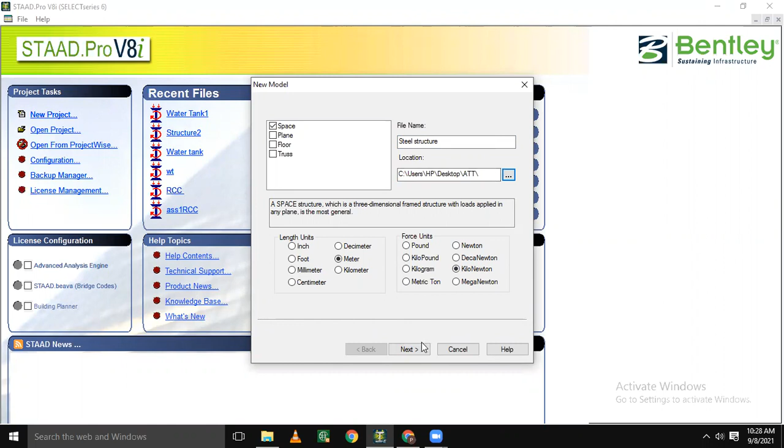Okay, I'll take a new project. Click on space. I'll give a structure name, steel structure. Unit should be in meter and kilonewton. Click on add beam. Click on finish.

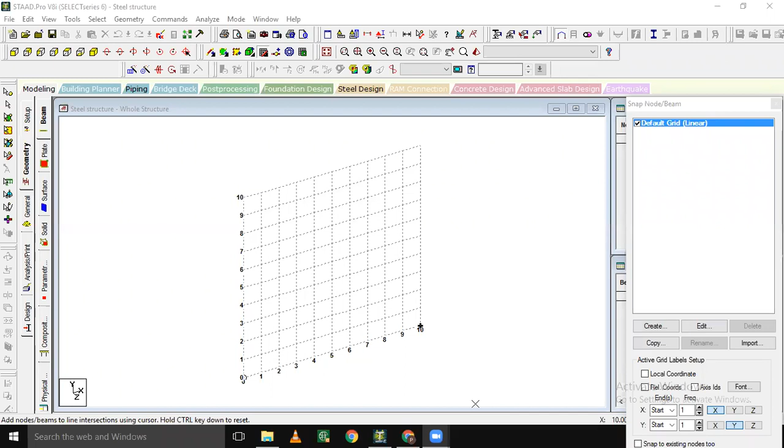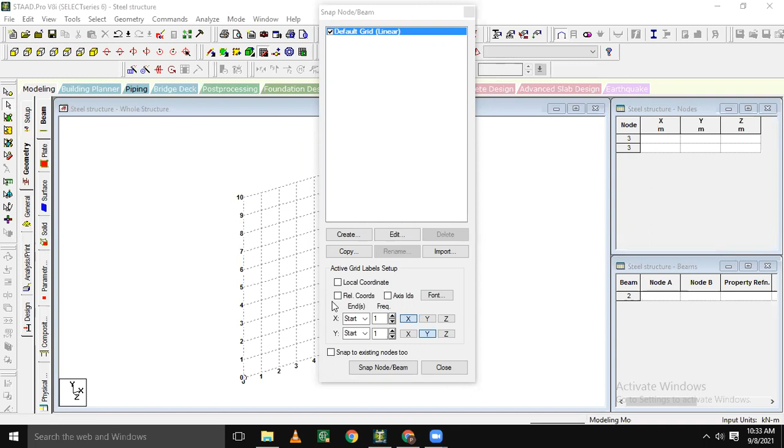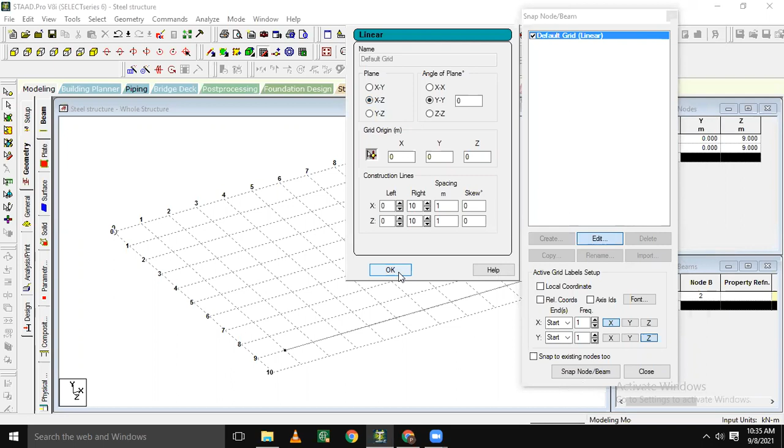Okay, what we have done, we go in SnapNode. Now in SnapNode, go to edit command. In edit, select XZ plane, okay, and click on OK. Then go to Snap Node/Beam box and click on it, using this SnapNode beam command, make a beam.

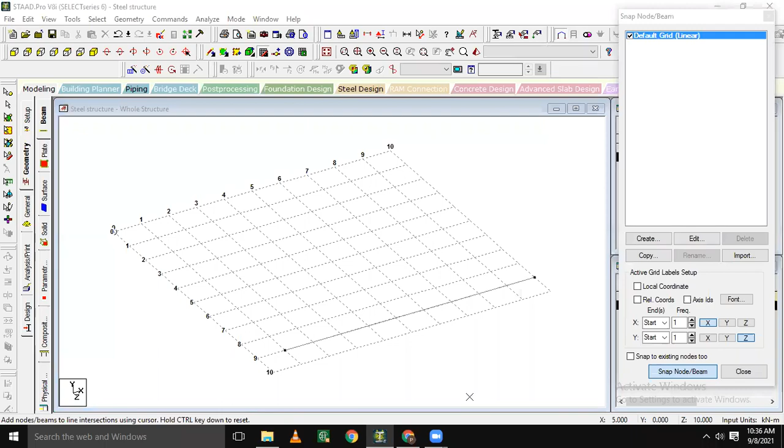Okay, now we created a grid of length 9 meter and width 9 meter. Now the next step is we need to give the height to this grid to make it a frame.

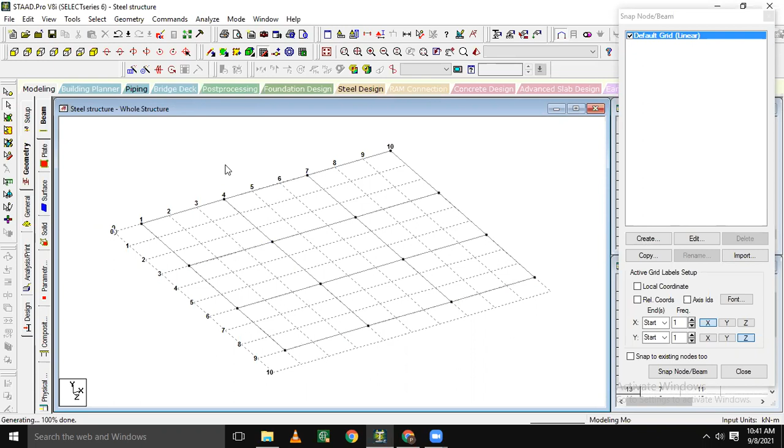Now just Control A, select all these beams, and again use command translational repeat. Now the direction will be y direction, so we need to select global y direction.

Number of steps, we need 2 floors plus foundation, so number of steps are 3. Default spacing will be 3, but my foundation is of 1.5 meter. First floor is 3 meter and second floor is 3 meter.

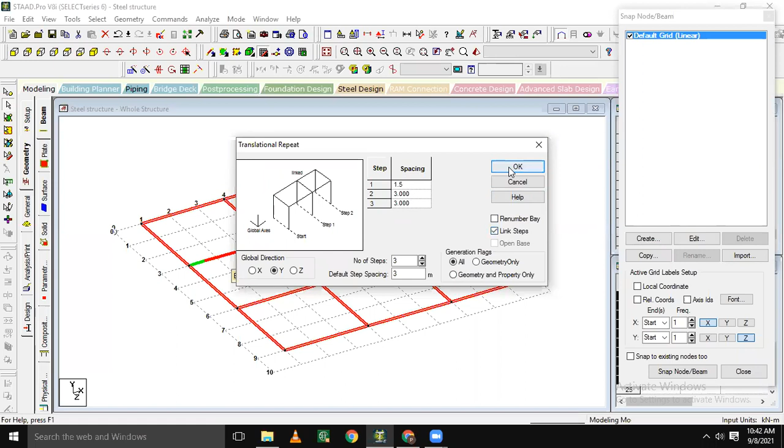Superstructure is of 6 meter and substructure consists of 1.5 meter. Now click on link step, click on OK.

Now just delete all the bottom beams, and turn off this grid. हे खालचं grid आहे ते off कसं करायचं?

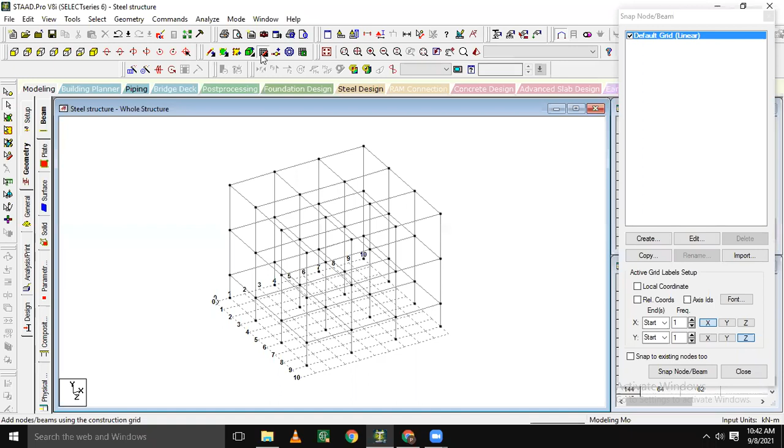For that you need to go to Snap Node/Beam and just unselect it. Just unselect the SnapNode beam and it will get off.

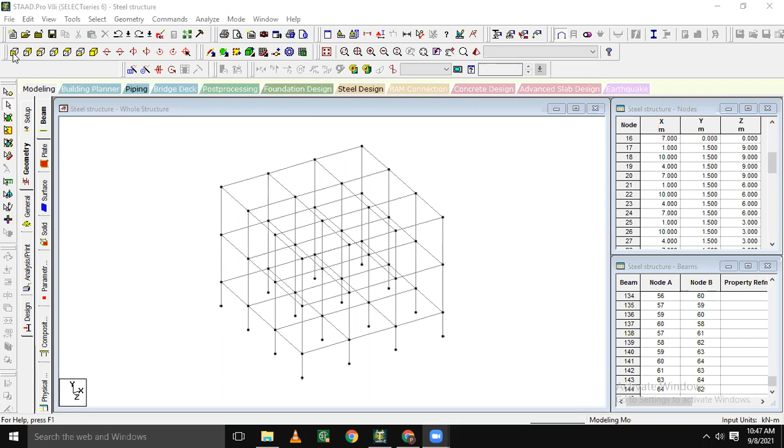To assign support, keep your structure in front view. Next step is assigning support. To assign support, keep your structure in front view.

Go to command. In command, we need to select support specifications. In support specification, we need to select fixed support.

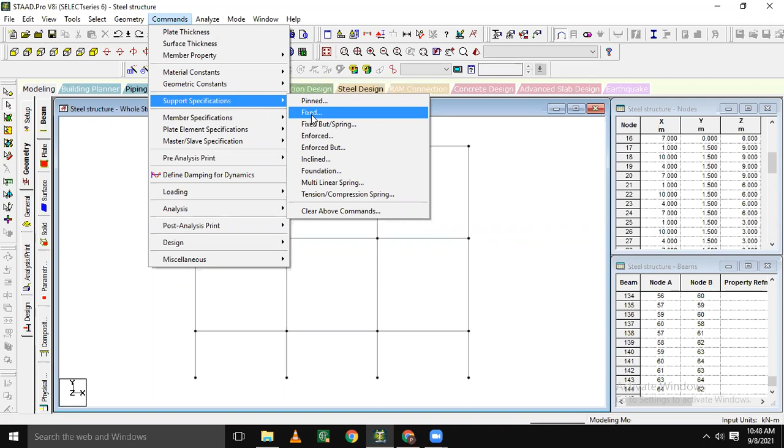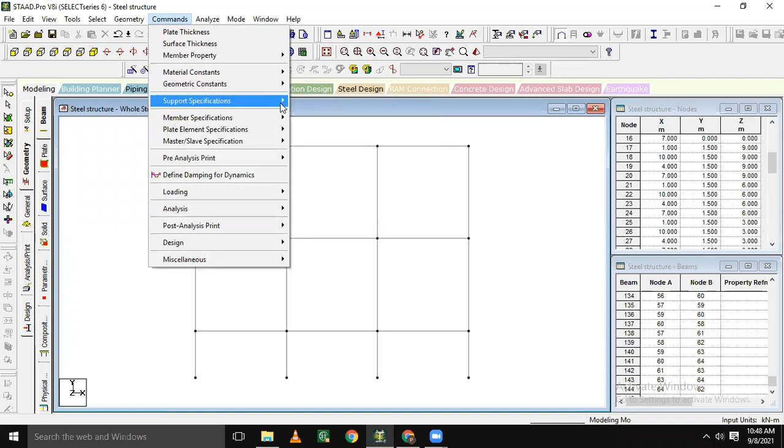Okay, got this? Just click on fixed support. In command, go to support specification and select fixed support.

Now you can see this support page will open. इथे खूप सारे फोर्सेस आहेत - फाउंडेशन, इनक्लाइंड, फिक्स्ड, पिन, फिक्स्ड बट वगैरह फोर्सेस आहेत, एनफोर्स बट, स्प्रिंग सपोर्ट. आता आपल्याला फिक्स सपोर्ट हवाय. फिक्स सपोर्ट मध्ये काय असतं? Forces as well as moments are restrained in fixed support.

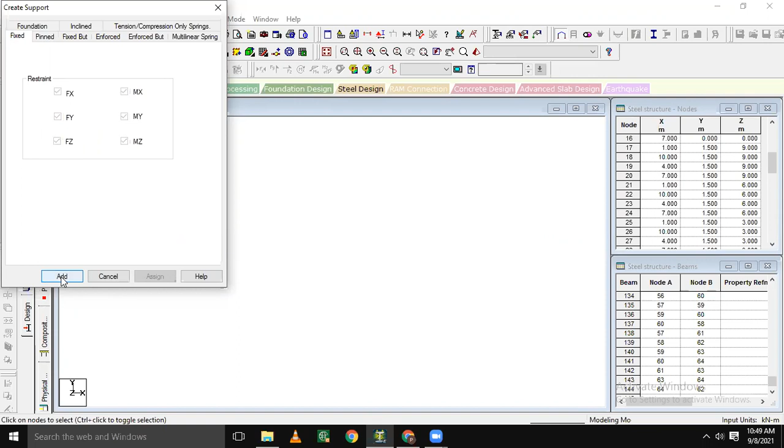In pinned support, only forces are restrained. We need to select fixed support, just make sure all these boxes are checked, and click on add. Now go to support again.

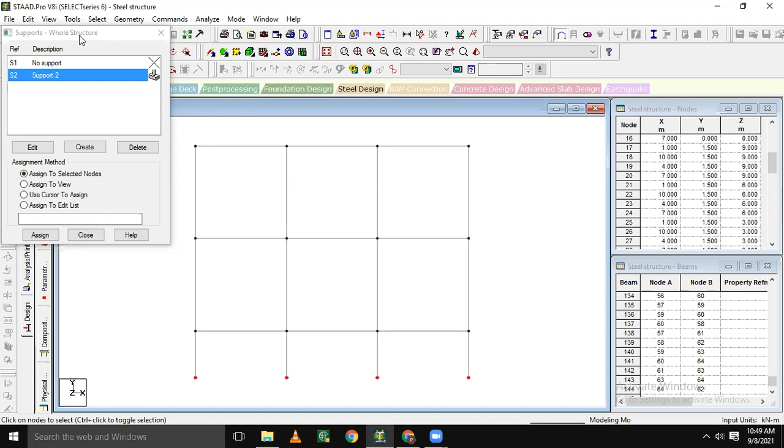Go to selected support again, and by using node cursor, just select the bottom nodes of the structure. Here red highlighted, that means all the bottom nodes are selected. Just click on assign to selected nodes and assign it.

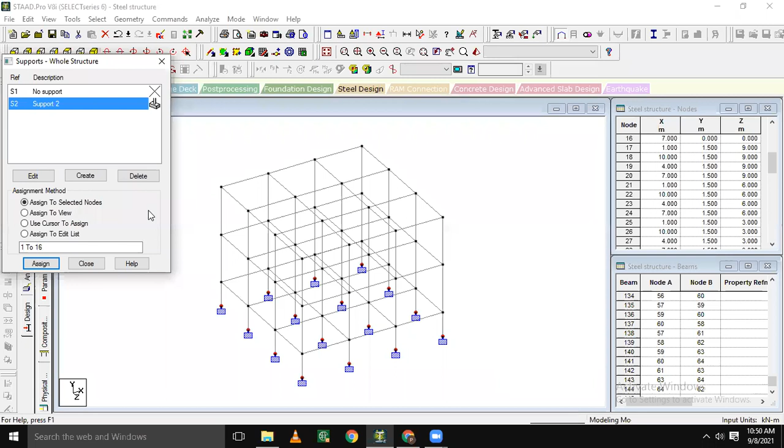की अजून एकदा रिपीट करायचं?

Next step is we need to take a check for duplicate member and duplicate nodes. For that, go to tools, then check duplicate, and click on nodes. Tolerance will be 0, click on OK. It says no duplicate nodes are found, meaning duplicate nodes are not present in the structure.

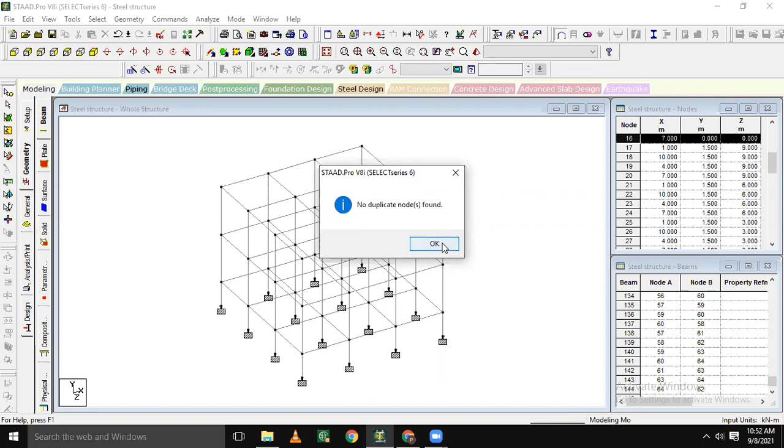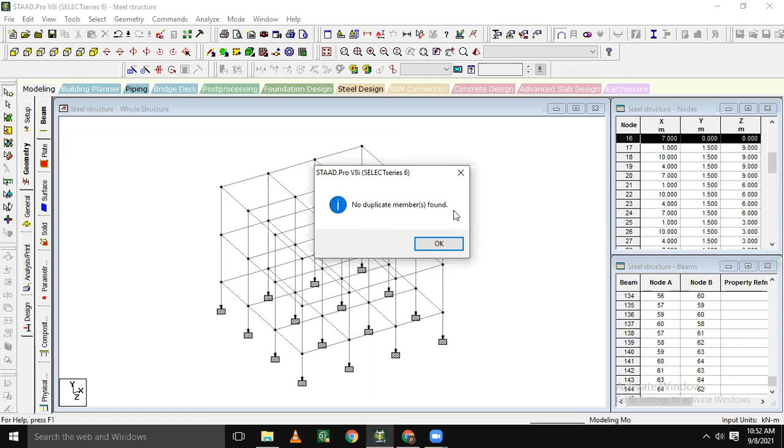Click on OK. Now check for duplicate member. Go to tools, check duplicate member. It shows no duplicate members are found, meaning our structure is okay. Click on OK.

Okay, now the next step will be property assign, assigning the properties.

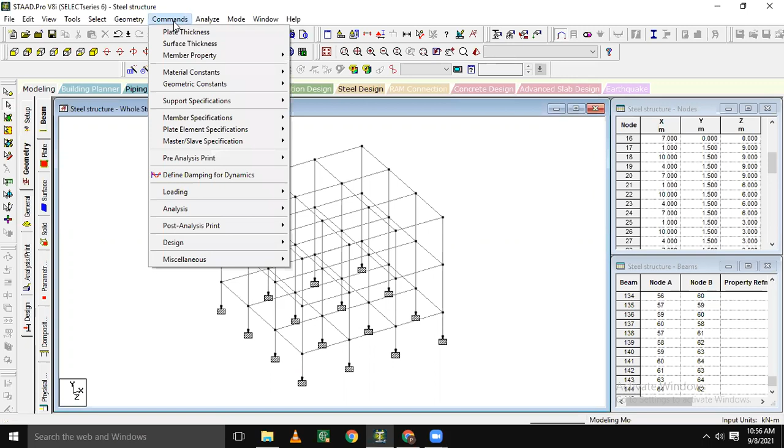For that, go to property page, go to command. In command go to member property, and in member property go to prismatic.

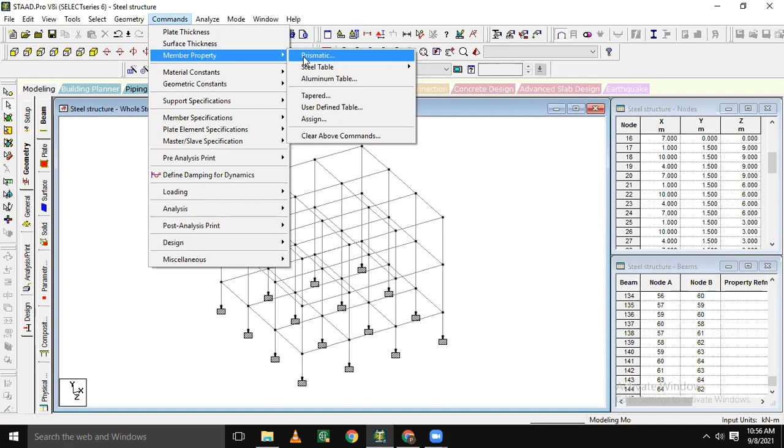Select prismatic. Now this is a steel structure. In steel structure, to assign member property we need to go to section database, and in section database we need to select Indian sections.

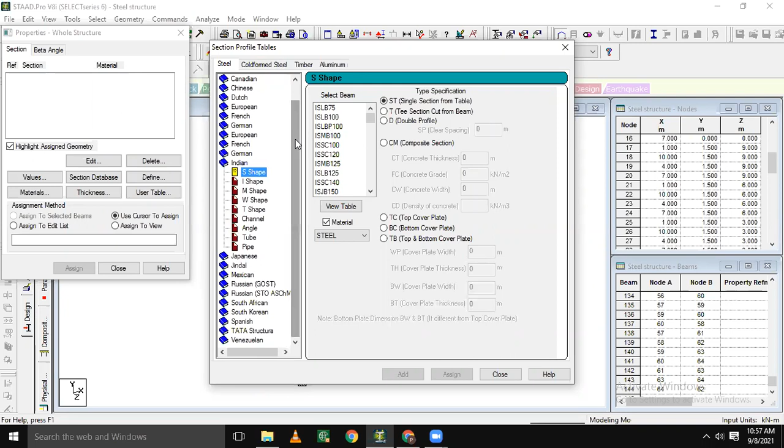Click on Indian. Now as per your requirement select the sections. For beam I will select ISMB 100, Indian Standard Medium Beam 100, and click on add.

And for columns I will select channel section, ISMC 100 double channel front to front. Here type specifications are available; in type specification I have selected double channel front to front.

Just make sure the material is steel material, and click on add.

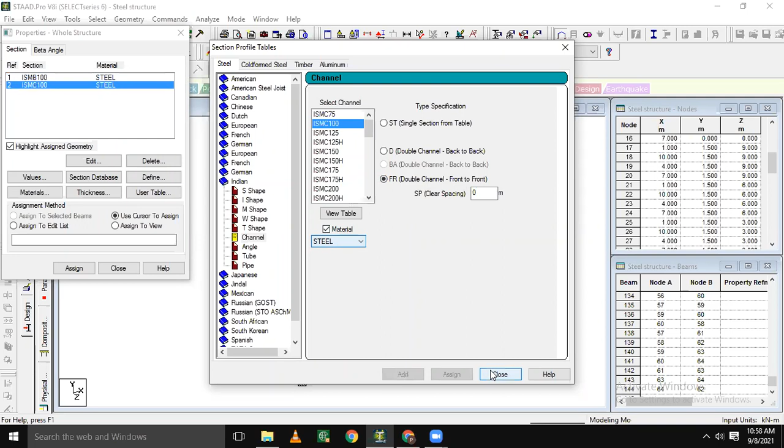Now assign these properties to the structure. ISMB 100 for all the beams. For that, select all the beams. How to select the beams? Just go to select.

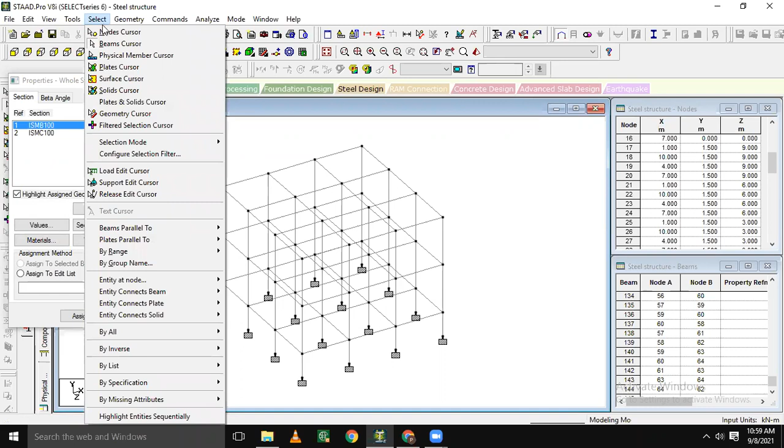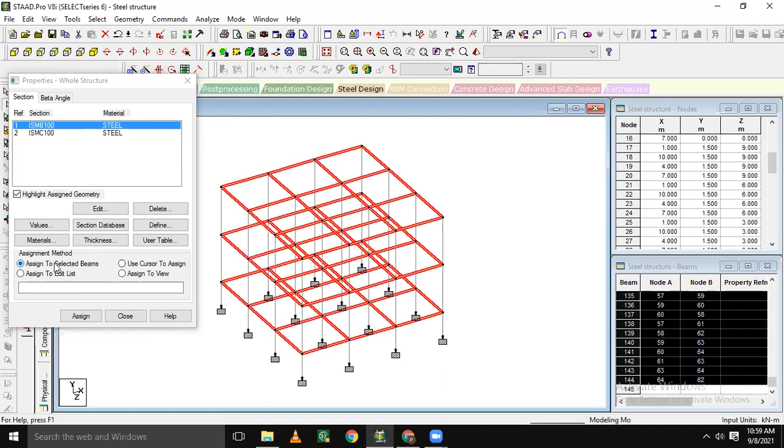In select option, go to beams parallel to x-axis, then again go to select and beams parallel to z-axis. Now we have selected all the beams. For assigning, select assign to selected beams, go to assign, and assign it.

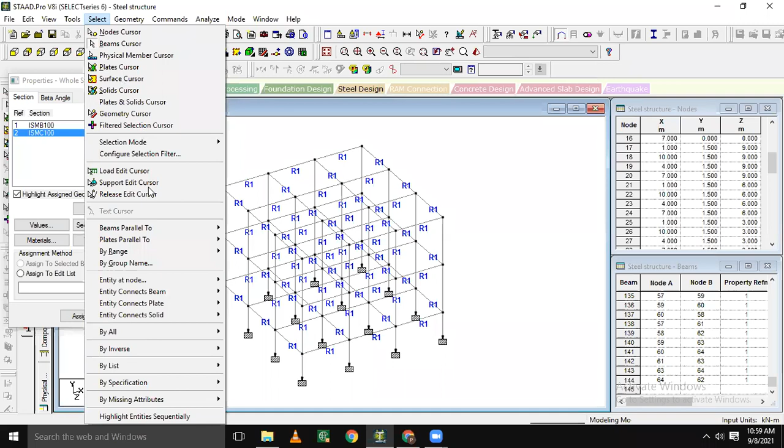Now similarly, assign the properties for the column. Select all the columns by going to select, then select beams parallel to y-axis, and assign it.

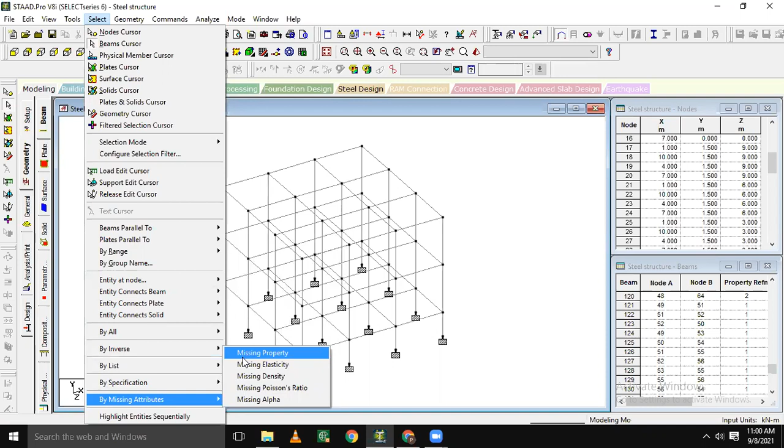Then if you haven't missed any property, it will show no entity with the missing property is found. Now just click on OK.